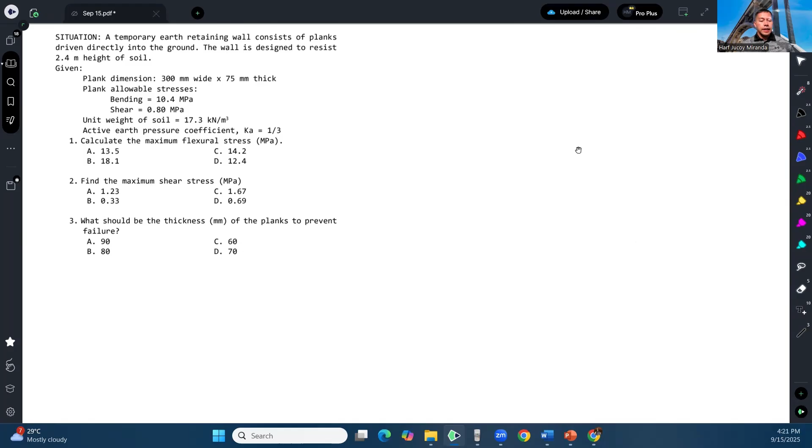A temporary earth retaining wall consists of planks driven directly into the ground. The wall is designed to resist 2.4 meters height of soil. You are given the plank dimensions: 300 millimeters wide and 75 millimeters thick. Plank allowable stresses are 10.4 megapascal for bending and 0.8 megapascal for shear.

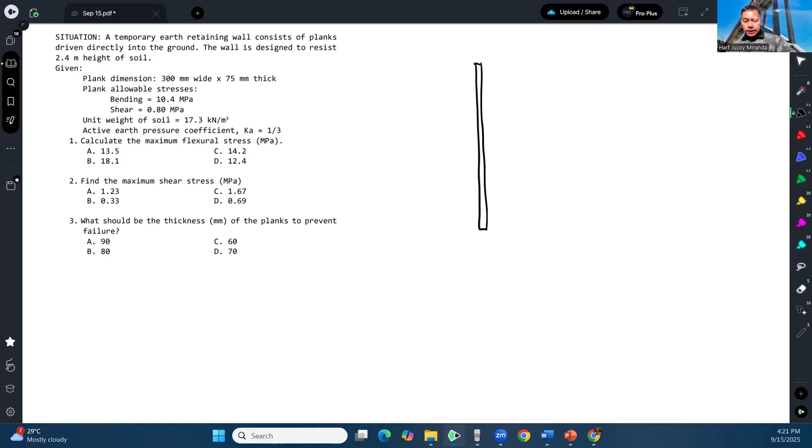Now let's try to draw the plank. The plank looks like this, similar to a retaining wall. In the side view, it looks like this. Let's say this is the plank, and this is the soil. It's driven into the ground since it has no strength unless it's driven into the ground.

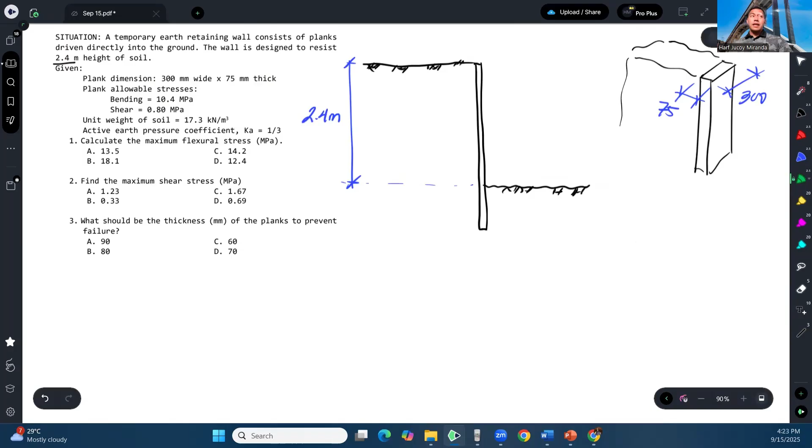Now, what is the maximum flexural stress? What we need to know here is the stress distribution of the soil. The stress distribution of the soil is like any medium, triangular. Zero at the top, linearly increasing going down to the bottom, and that's what we'll analyze.

So like this, where the magnitude of this pressure at the bottom, let's call it W. W of the soil can be calculated as follows. First, we have to compute the effective pressure at this point, and we should know that computing the effective pressure is simply the gamma of the soil times the depth, or how deep it is, so gamma of the soil times the depth, which I'll call H.

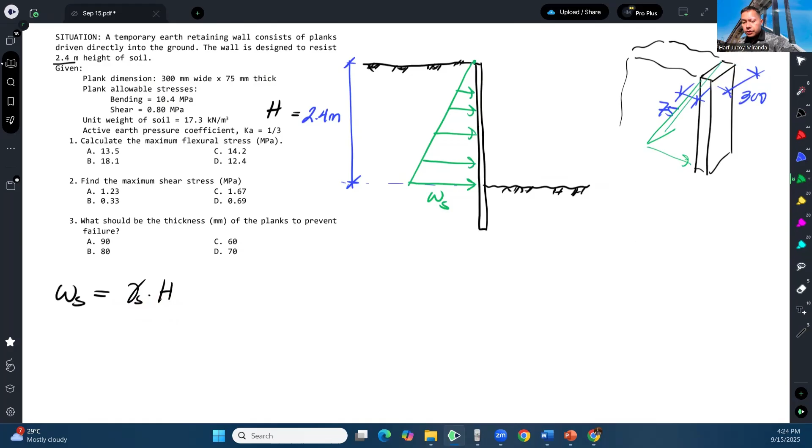But this is still vertical pressure, because our computation of gamma H is vertical pressure, meaning the loading is downward. What we want is to convert it to horizontal, and that's why we're given this active pressure coefficient. In soil mechanics, that's what we multiply by the vertical pressure to make it horizontal pressure, so that's why we multiply by Ka.

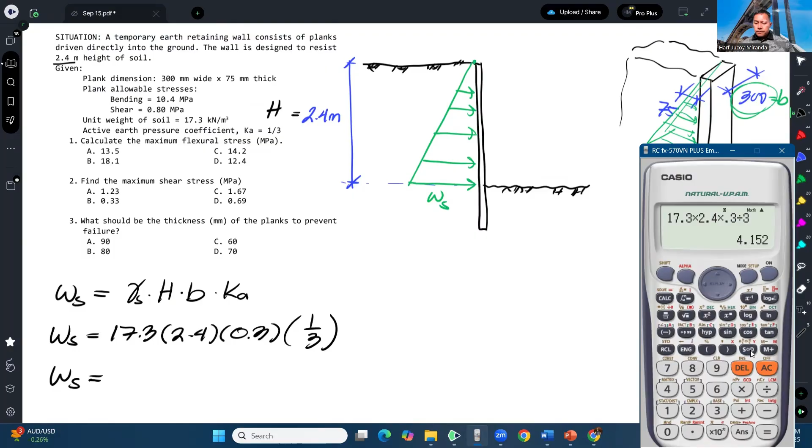That's how we compute the horizontal load of the retaining wall. That is 17.3, H is 2.4, width is, so be careful, needs to be in meters, so 0.3, and Ka is 1/3. So the soil uniform load at the bottom will be 4.152, and this is in kilonewton per meter.

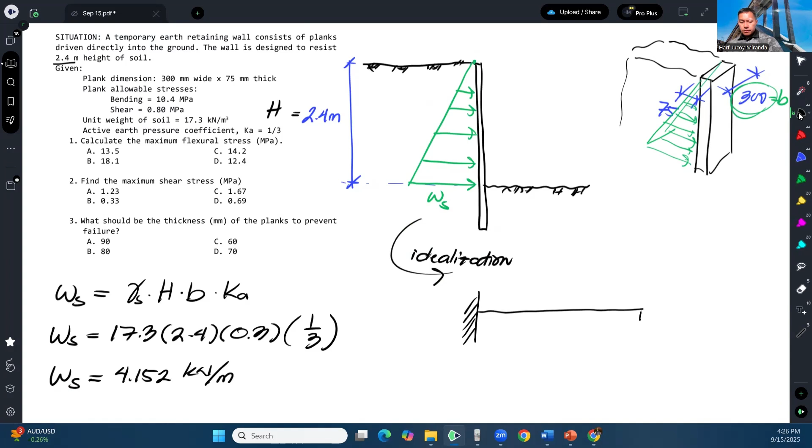Since we have that, we can now idealize this like a cantilever beam, because we imagine a fixed support. The way it's driven in here, that's what provides the fixed support. Then it's just like a cantilever beam with a triangular load, so we can idealize it like this, with an intensity of 4.152 kilonewton per meter. There's a reaction R here, and a moment reaction M here.

With this, we can answer what is the maximum flexural stress by first calculating M. Let's call this point A. Taking summation of moment at point A equal to 0, assuming counterclockwise is positive, we will have M minus the moment of this triangular load. First, the equivalent load is the area of the triangle, so 1/2 base times height, and then times moment arm.

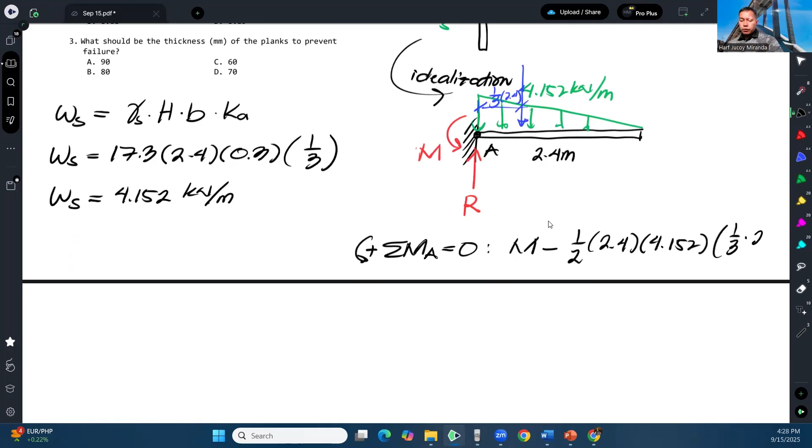The equivalent load is there, and the moment arm is where the centroid of the triangle is, which is here, which is 1/3 of 2.4. So we will have 1/3 of 2.4, and that is all equal to 0. From there, we should be able to calculate the maximum moment, which for a cantilever is our maximum moment.

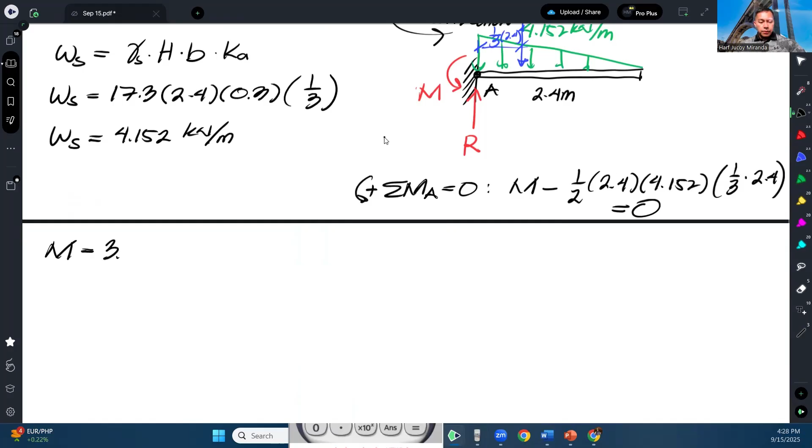And that is 3.986 kilonewton meter. Okay, so that is our maximum moment.

Now, finally, we can calculate the maximum flexural stress. So the flexural stress is once again MC over I. So what's our cross-section here? Our cross-section here is rectangular. This is our cross-section.

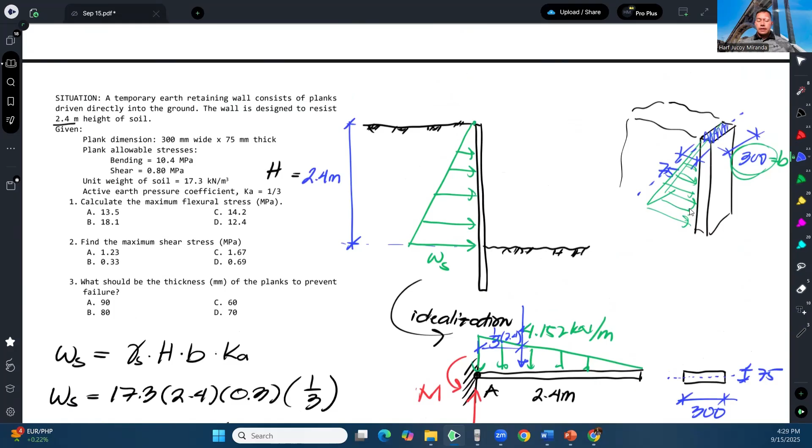So that means, let me enlarge the section. This is the neutral axis. So the bending, our C, is from the neutral axis to the extreme fiber, which is 75/2. Then our I is, whatever this B is, BH³/12, where H is the thickness.

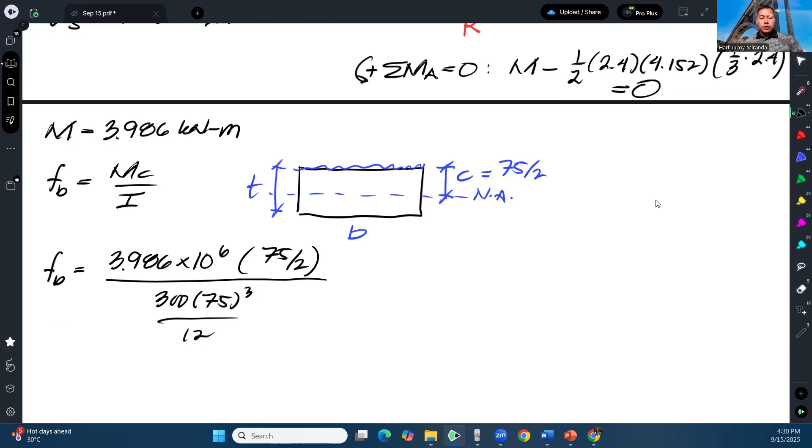Okay, so therefore we have 3.986, let's make it Newton-millimeter. Then our C is the thickness over 2, or 75/2, over I which is BH³/12, so 300(75)³/12. Okay, if you're curious about the formula that's different, the 6M over BD squared, that comes from MC over I.

Because if you have a rectangle with height H, let's make this H, the moment of inertia becomes BH³/12, and the C becomes H/2, so the bending stress becomes MC over I.

Okay, so cancel this H, it becomes H squared. Then this 12 goes up, multiplied by 1/2, becomes 6. So it's 6M over BH squared or BD squared.

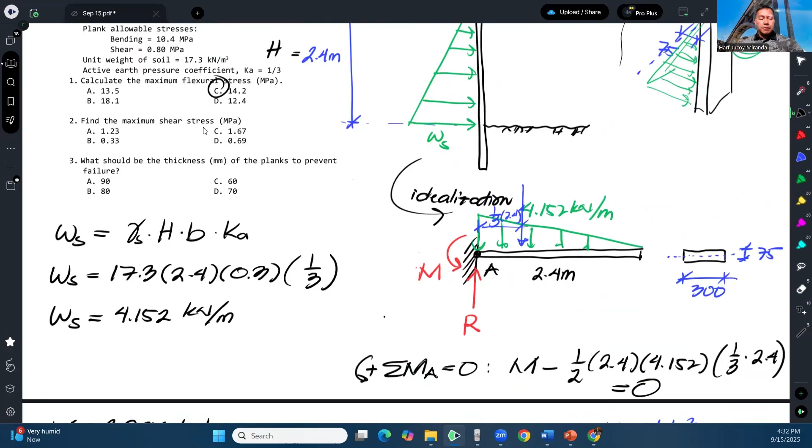Next, what is the maximum shear stress? So as I mentioned, when there's presence of bending, the default stress we take for shear is the flexural shear stress, because bending is present.

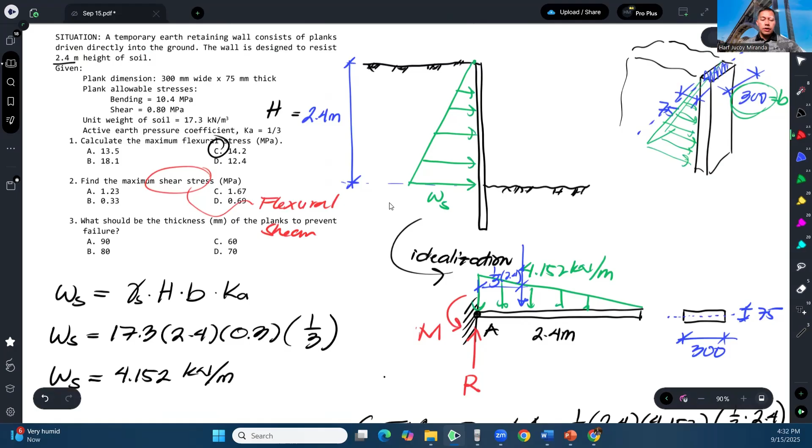Okay, so what is flexural shear stress? The formula for that is VQ over IB. Okay, VQ over IB. Where Q is the statical moment of area

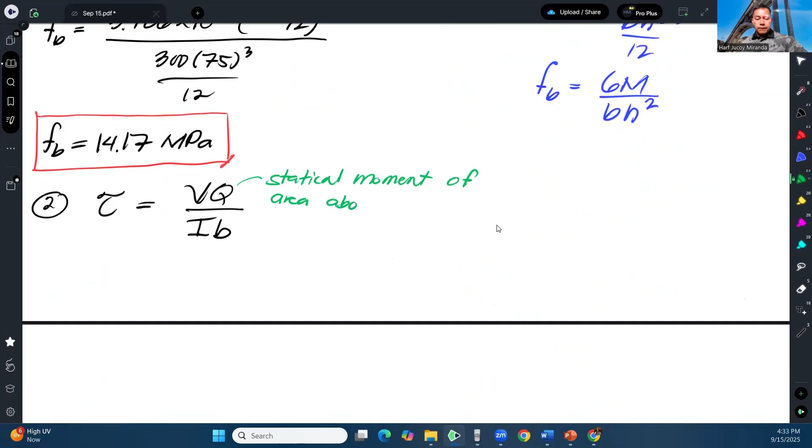above or below the fiber in consideration, about the neutral axis. So it's just moment of area, above or below the fiber in consideration. Then the I is moment of inertia, we already know that. Then the B is the width of the fiber in consideration.

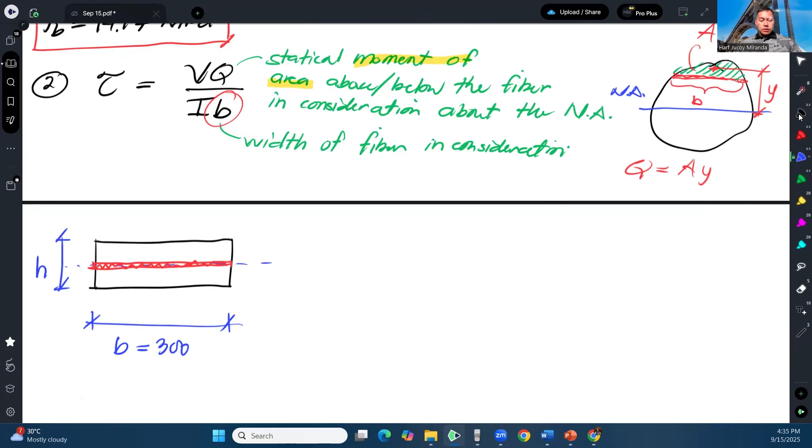So the Q for this area, the moment of area about the neutral axis, will be area, which is B, times h over 2. Right? This is it. H over 2, times B. So that's the area of this. Times the moment arm, h over 4.

So that's now the Q, or simply BH squared over 8. Now, the shear stress is VQ over IB. So what is I? It's BH cube over 12.

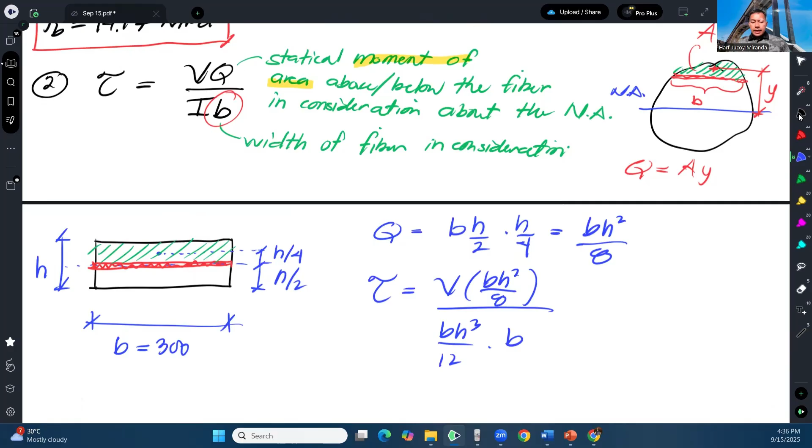Then B. And here there are things that cancel. The B here cancels with this B, and then H squared cancels with H cube, so you're left with just H. Then this 12 moves up, and 12 over 8 gives you 3 over 2. So you can simplify this as 3V over 2BH.

But what is BH? That's the area of the total, the whole section. So that's the area. That's why some memorize it as 3V over 2A. But again, that's only for rectangular sections.

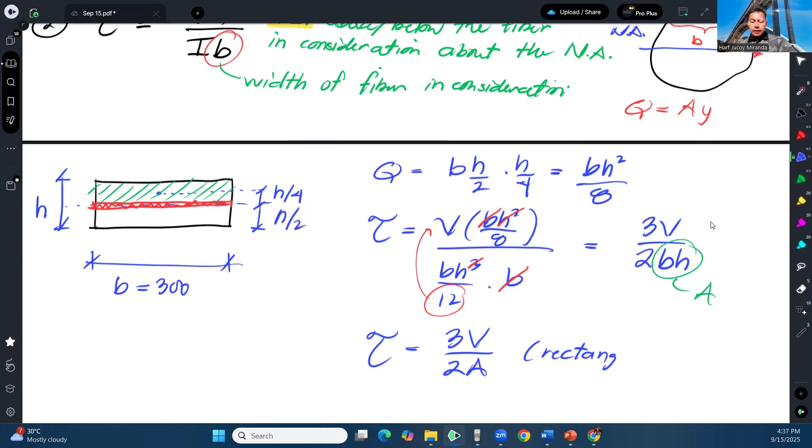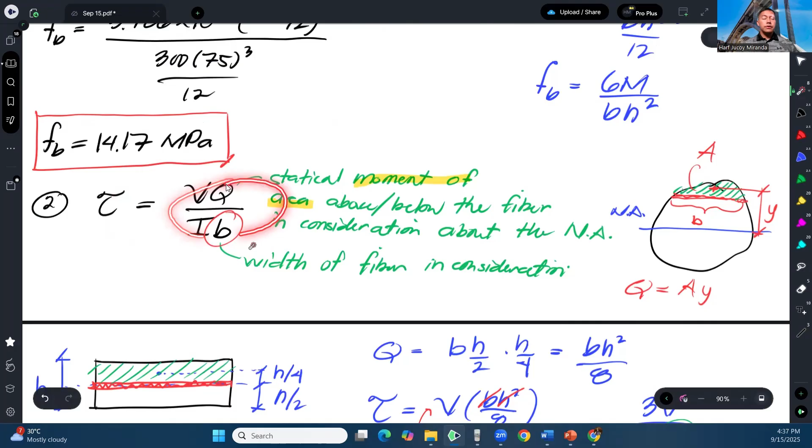So anyway, to calculate the shear stress, what's the shear force, the maximum shear? The maximum shear again comes from the load. We need to get this reaction, and that will actually become the maximum shear. To get that, we will just take the summation of forces.

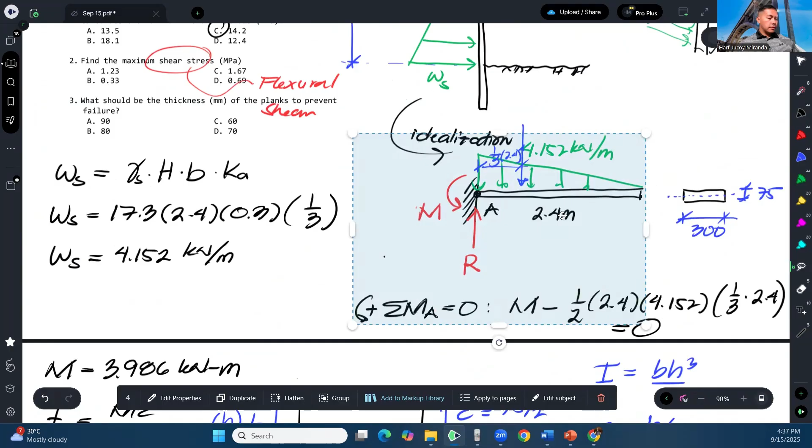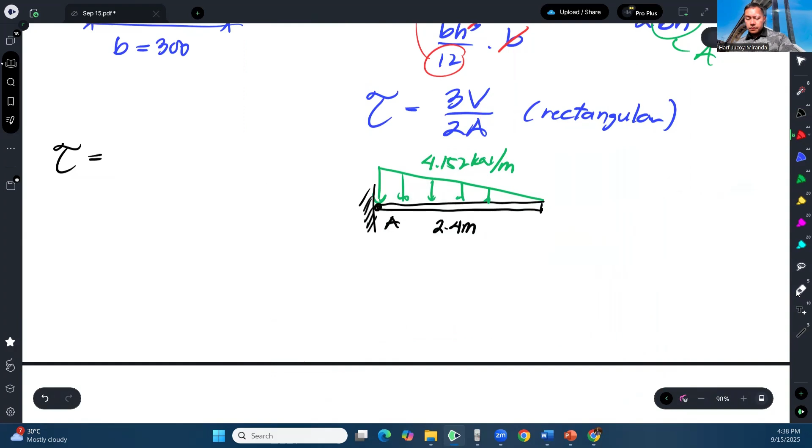Let me just copy this down below. Okay, so taking summation of forces y equal to 0, we have r is equal to 1/2 base times height.

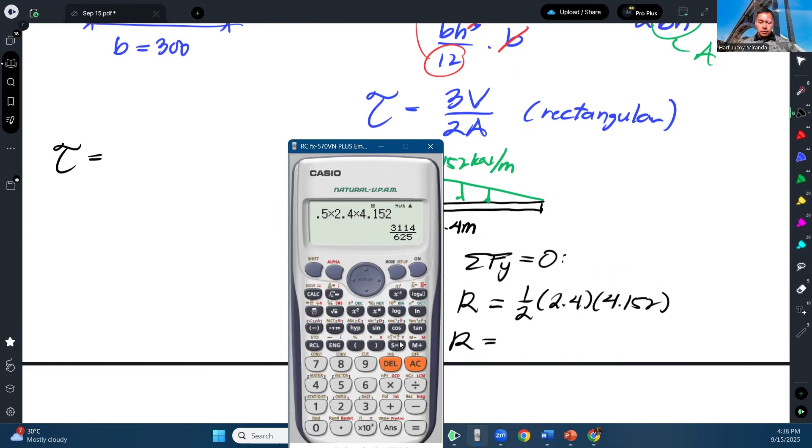So the reaction is 4.9824 kilonewton, and this is also our maximum shear.

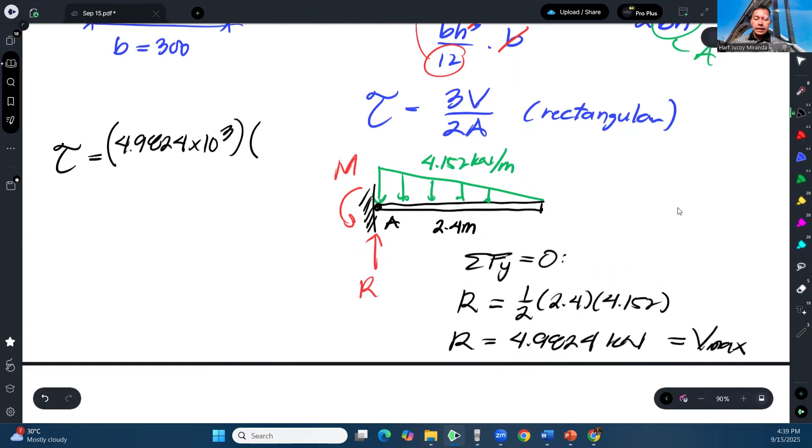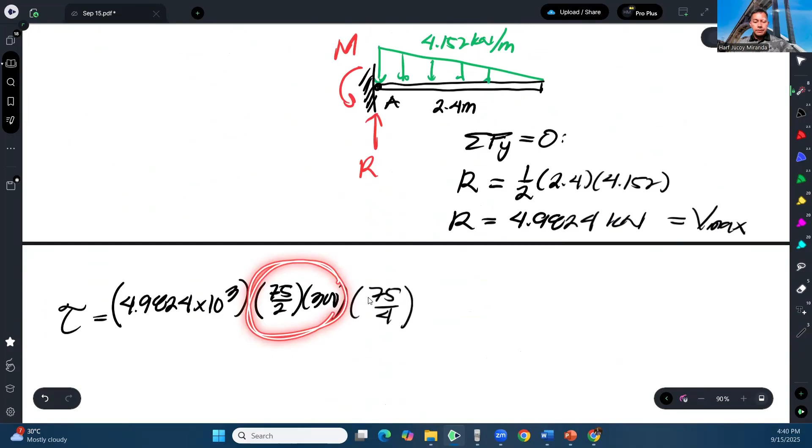Then this is 300. So 75 over 2 times 300, times the moment arm. So the moment arm is 75 over 4. So this is the area, and this is the moment arm, from here to the neutral axis.

Okay, and then over I. So the I is B H cube over 12, then the B is 300. And that will be the maximum shear stress.

So that gives us 0.33 megapascals, and that will be our answer.

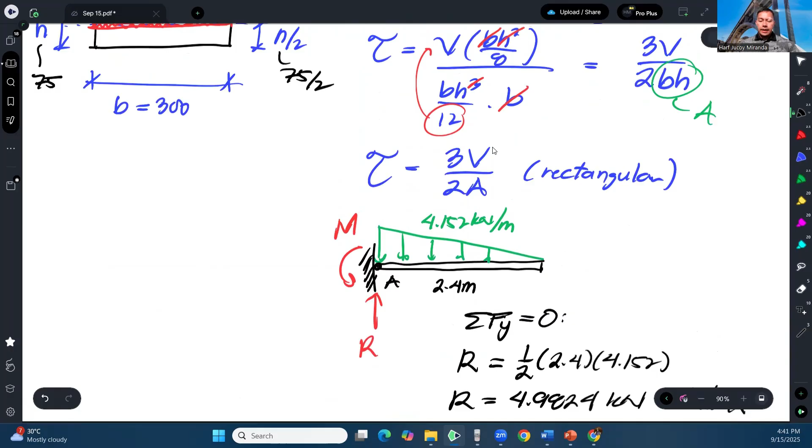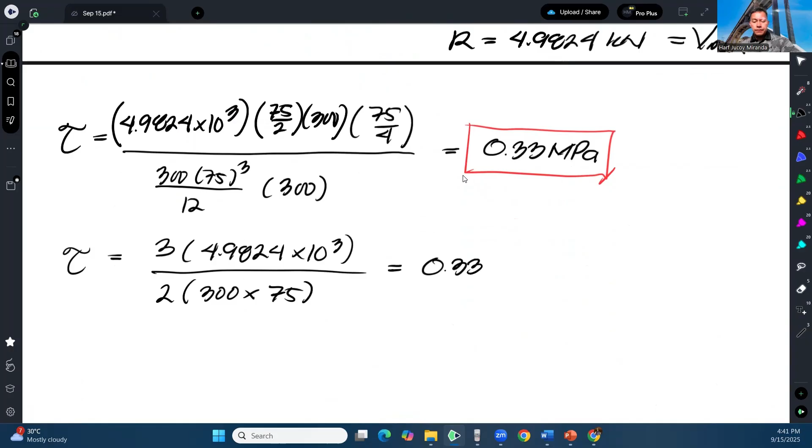If you want to verify that with this formula, this works too. It should give the same answer. So 3V, let's make it Newton, over 2A. What's A? 300 by 75. We are expecting to have the same answer, if that's the formula you have memorized.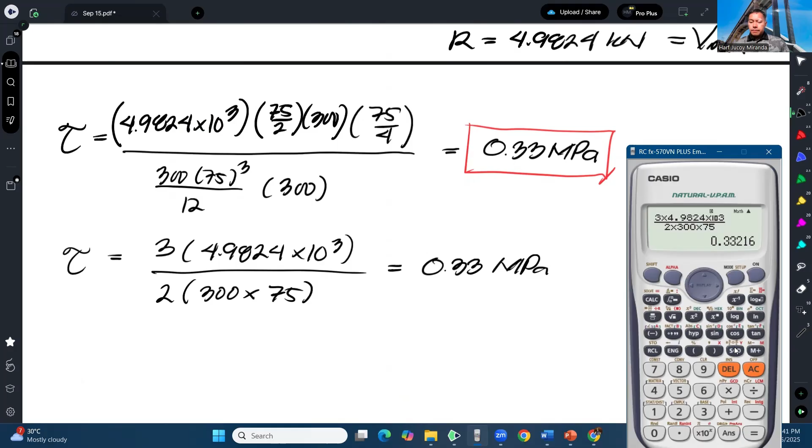Okay, so there, 0.33. So anyway, our answer for number 2 is 0.33.

Lastly, what should be the thickness of the planks to prevent failure? So if you noticed, the bending stress in number 1 was 14.2. The allowable is only 10.4. Then the maximum shear stress was 0.33.

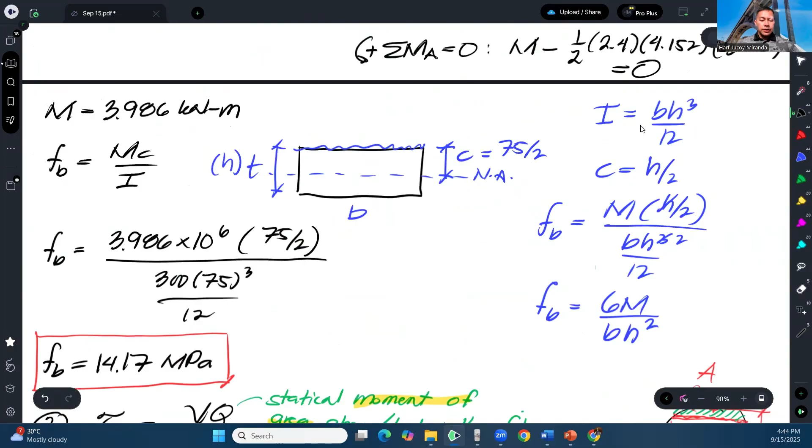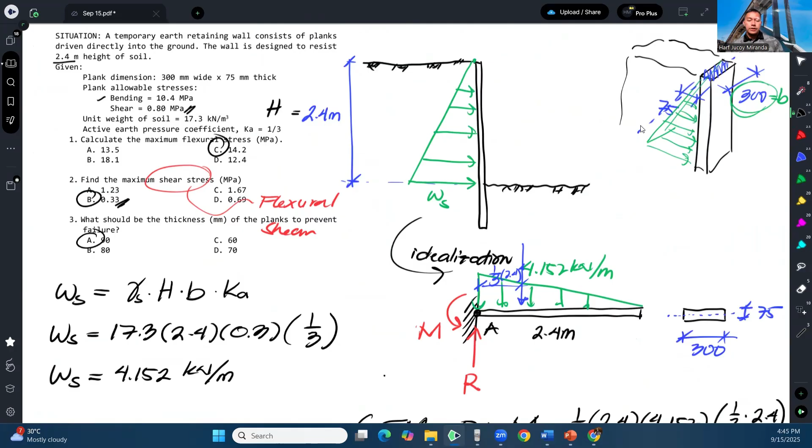And that's how we solve this problem.